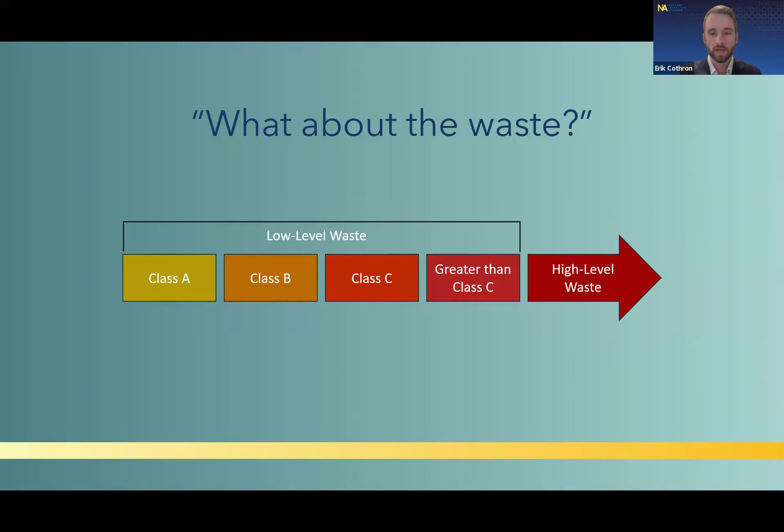The overall goal of waste management for any of the classifications you see here remains the same, and that's to safely isolate the waste and prevent any release of radioactive material to protect the environment and ensure public health and safety. But the specific storage, transportation, and disposal methods used need to be tailored to the specific waste classification in question.

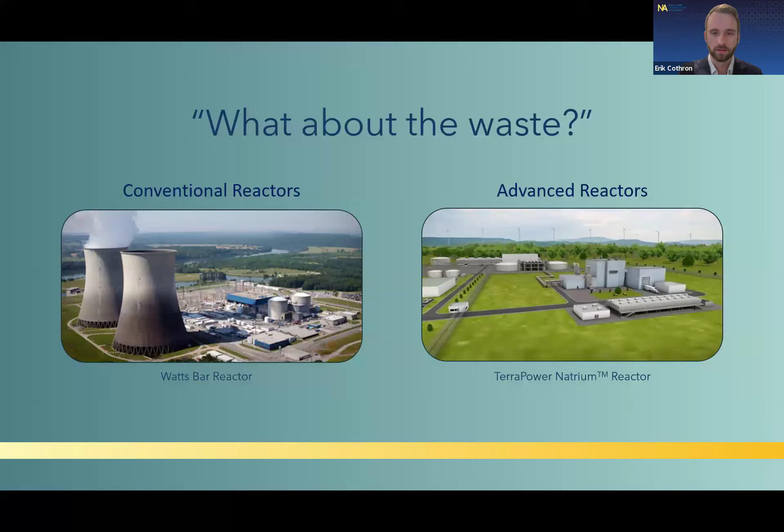The answer to the question, what about the waste, also depends on if we're talking about waste generated by conventional nuclear reactors or advanced reactors. So let's look at spent nuclear fuel from conventional reactors as an example. We know that it consists of spent fuel assemblies that contain uranium fuel pellets.

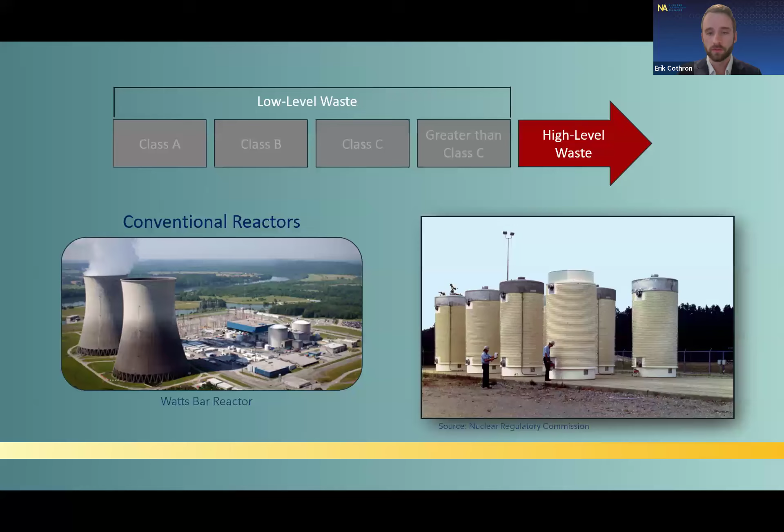So that covers conventional reactors, but what about the advanced reactors that we are seeking to deploy by the end of the decade? More specifically, what will waste from advanced reactors look like? How will it differ from waste generated by conventional light water reactors? How prepared are we to manage advanced reactor waste streams? And what areas require further investigation?

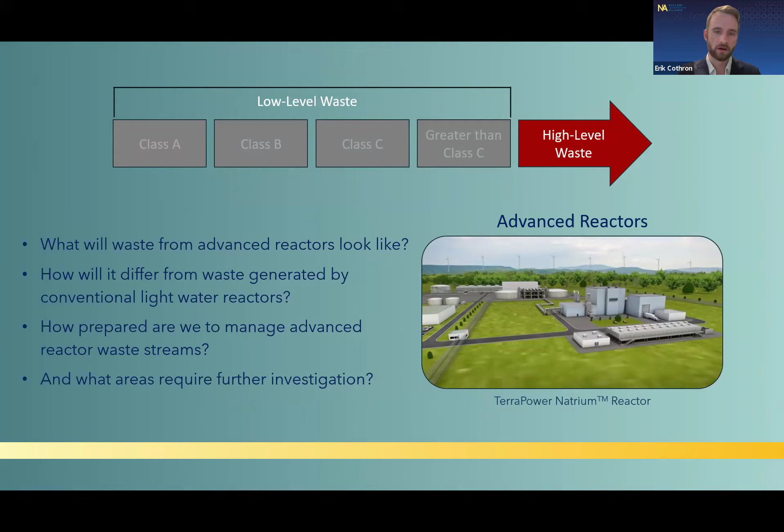And it's the answer to these questions that are exactly what our new report aims to provide. And just like Judy said earlier, the way we manage advanced reactor waste will generally look the same as it does for conventional reactors. We're going to place the waste in specially engineered containers or casks that are designed to safely store the waste until it has either decayed to a safe level, or for high level waste until we can send it to a permanent disposal facility.

But the specific waste management strategies we use must be tailored to the waste that's being managed and its unique characteristics. So in the next few slides, we'll take a closer look at these characteristics to get a better sense of what advanced reactor waste will look like.

Before we do that, I should note that the rest of my presentation today will primarily focus on spent nuclear fuel, because that's typically what most people are concerned with. And if you want more information on low-level waste, I encourage you to check out the full report.

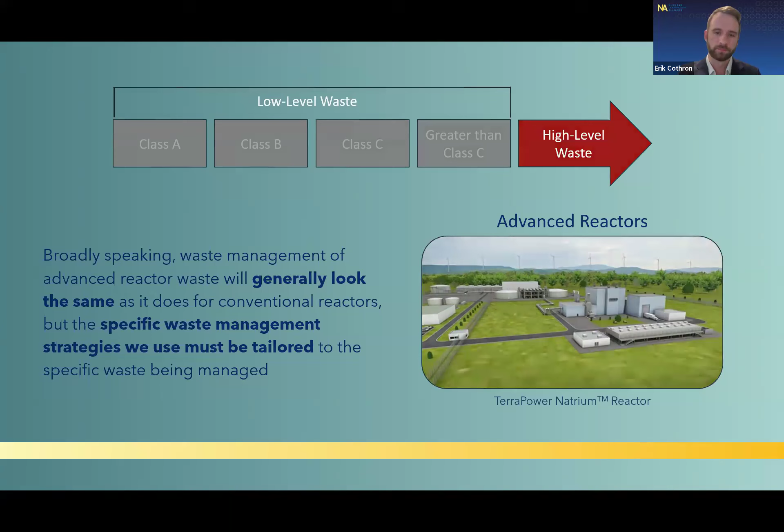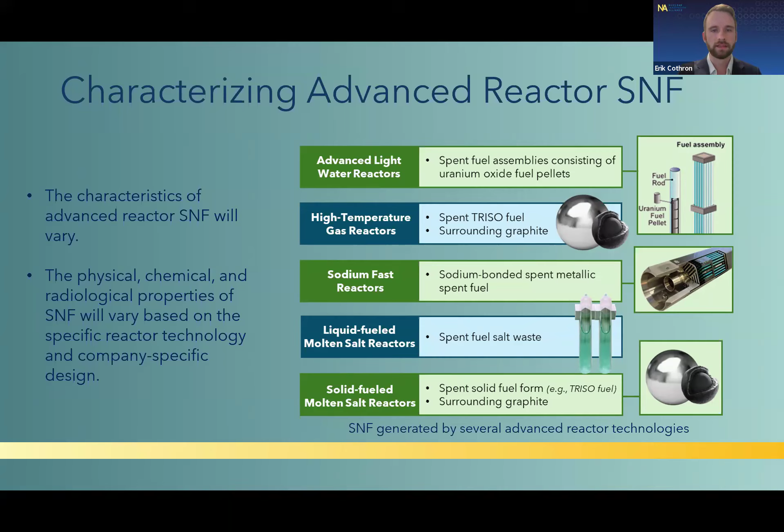So the characteristics of advanced reactor spent nuclear fuel will vary. More specifically, its physical, chemical, and radiological properties will be based on the reactor technology and the specific company design. The image here shows the spent nuclear fuel generated by 5 different reactor technologies, including advanced light water reactors, high temperature gas reactors, sodium fast reactors, and liquid and solid fueled molten salt reactors.

Looking at advanced light water reactors, we'll see that they will produce the same spent nuclear fuel assemblies as conventional reactors. There will be a few minor differences. For example, the overall length of the fuel assemblies used for advanced light water reactors will be smaller to fit in more compact, small modular reactor designs. But overall, advanced light water reactors and their spent nuclear fuel management will be identical to the conventional light water reactor spent fuel management.

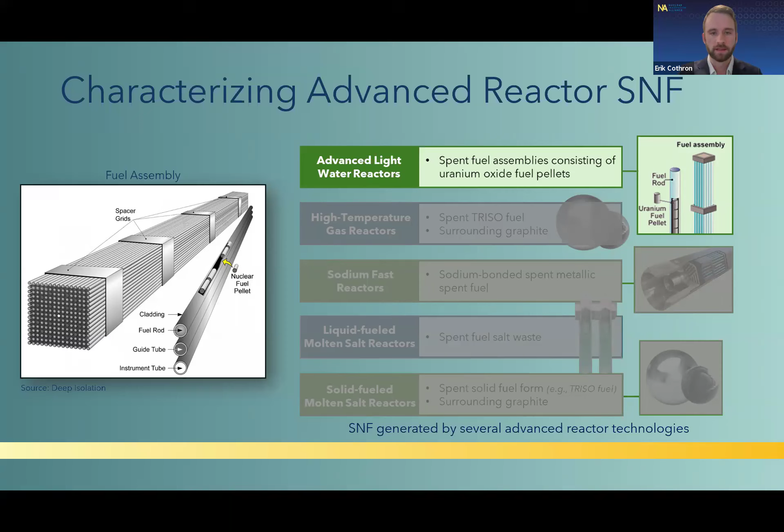High temperature gas reactors use TRISO fuel that consists of a uranium fuel kernel surrounded by several layers of carbon-based materials. These TRISO fuel particles are roughly 1 millimeter in diameter, so about the size of a poppy seed. And thousands of these tiny TRISO fuel particles can be embedded into a graphite matrix, like the spherical fuel pebble shown here, which is roughly the size of a tennis ball.

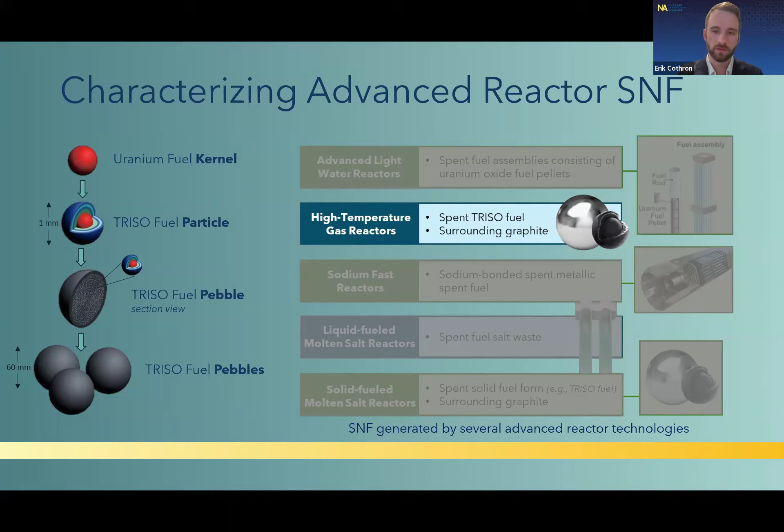So in this example, the actual spent fuel is the small TRISO fuel particle, but because there's no efficient or economic way to currently separate out the small TRISO particles from the larger graphite fuel pebble, the entire fuel pebble, including that graphite, is effectively your spent nuclear fuel form, which adds to the total volume of spent nuclear fuel that must be handled and disposed of.

Moving on to sodium fast reactors, they will generate a metallic spent nuclear fuel form that has chemically bonded to the sodium found within the fuel rod. And because sodium is highly reactive with water, we have to think about how to design and engineer containers or systems to prevent water from getting inside. This isn't necessarily a large challenge, but it's just an example of the kinds of specific considerations that need to go into managing different spent fuel types.

Now, in the interest of time, I'm going to skip over liquid and solid fueled molten salt reactors, but I encourage you all to dive into the full report to learn more about those.

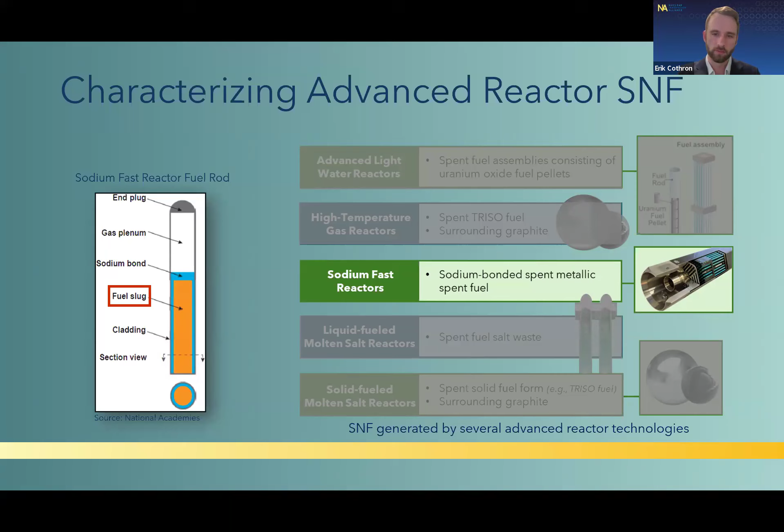Now, moving on to interim storage, because interim storage will play a critical role in the management of spent nuclear fuel, since the United States currently lacks a permanent repository. Fortunately, interim storage strategies are robust, and the United States is well prepared to ensure safe and effective management of spent nuclear fuel, including spent fuel from advanced reactors, until a permanent disposal solution becomes available.

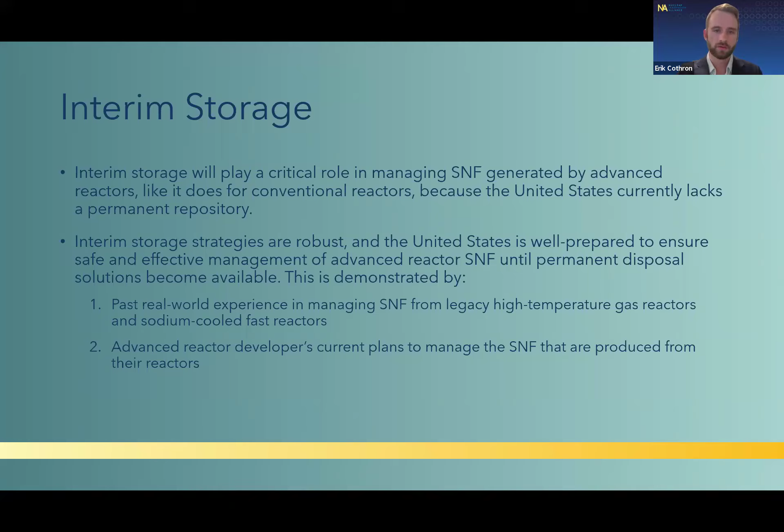This is demonstrated primarily by two things. One, past real-world examples in managing spent fuel from legacy high-temperature gas reactors and sodium fast reactors. We actually first operated these reactors back in the 60s and 70s. So in reality, these advanced reactor technologies and their waste aren't all that new. And number two, advanced reactor developers currently have plans to manage their spent nuclear fuel, which we'll take a look at in a few slides. But first, let's look at number one in more detail.

Here, we'll see that the United States has previously operated and decommissioned 2 high-temperature gas reactors and 5 sodium fast reactors, proving that the interim storage strategies we've already developed and used are robust, technically mature, and provide a means to safely store the spent fuel generated by future advanced reactors. So it's really the experience we've gained by already handling and storing this waste in interim storage that gives us a strong foundation for the future management of advanced reactor spent fuel going forward.

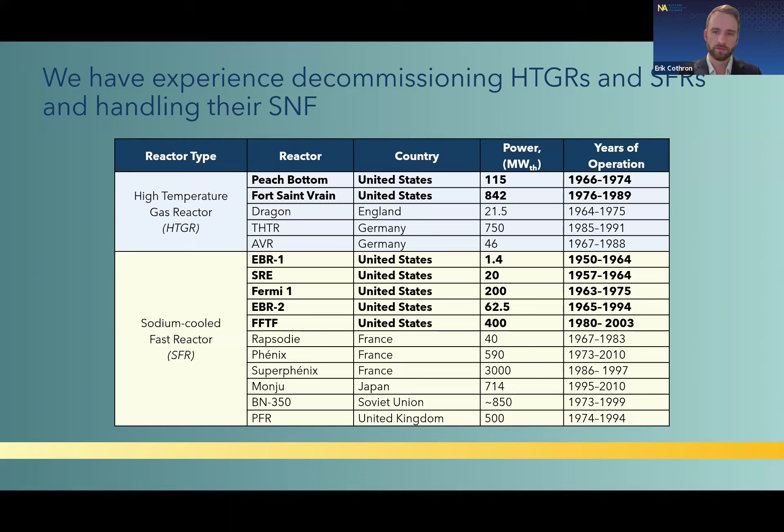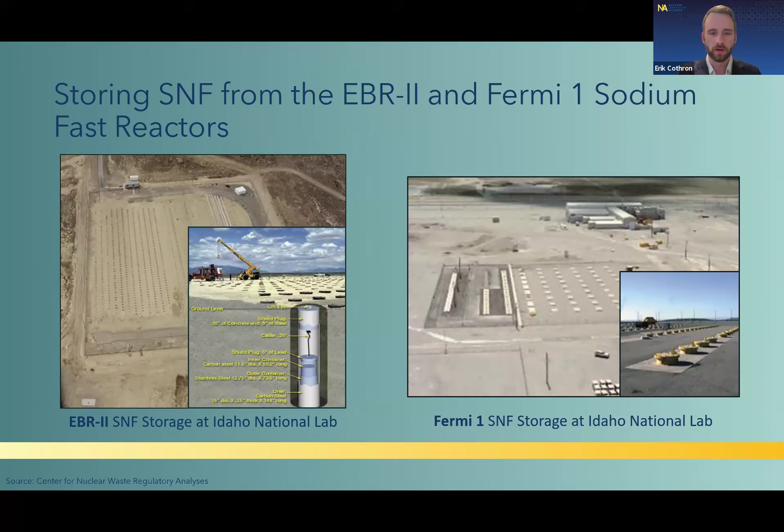Here are photos of the sodium bonded spent nuclear fuel from the EBR-2 and Fermi-1 sodium fast reactors, which is currently stored at Idaho National Laboratory. As you'll see, the spent fuel is in dry cask storage just below grade, and everything is stored in a very small footprint. And when I look at images like this, I can't help but think of how similar this looks to dry cask storage of spent nuclear fuel from conventional reactors, albeit below grade instead of above grade.

Now, moving away from the legacy reactors and looking towards the current plans that advanced reactor developers have to manage their spent fuel, here is a depiction of X-Energy's spent fuel intermediate storage facility that can be co-located with their Xe-100 high-temperature gas reactor design. In the top left of the image you see here, you can see how spent TRISO fuel pebbles can be moved with the use of a fuel handling system into spent fuel canisters, which can then be transferred to the storage facility through an underground access tunnel.

And then the renderings on the bottom here show how natural circulation of air can be used to keep the spent fuel cool.

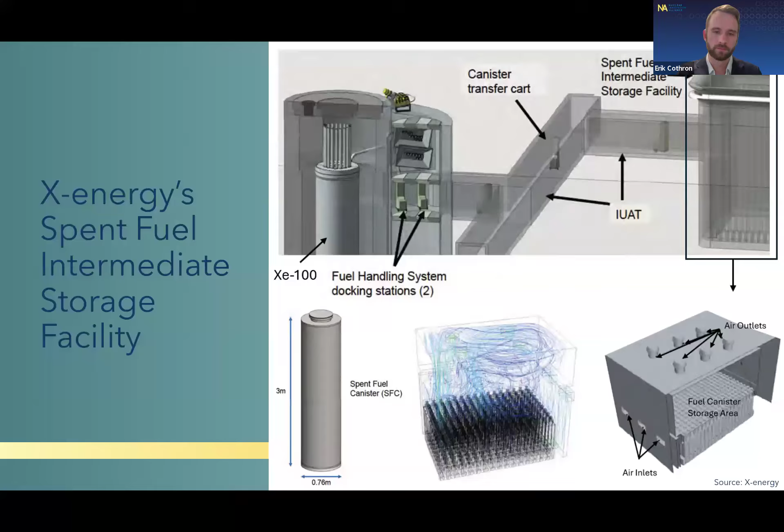Now, after interim storage, we need to permanently dispose of the spent fuel in some kind of deep geological repository. And while the United States currently has no such repository, it's important to note two things. That is, the safety performance of a geological repository is dominated by the engineered and geological barriers it utilizes, rather than the characteristics of the spent fuel. And therefore, advanced reactor spent nuclear fuel is expected to have little to no impact on the long-term safety performance of geological repositories, provided they are properly processed and packaged before being disposed of.

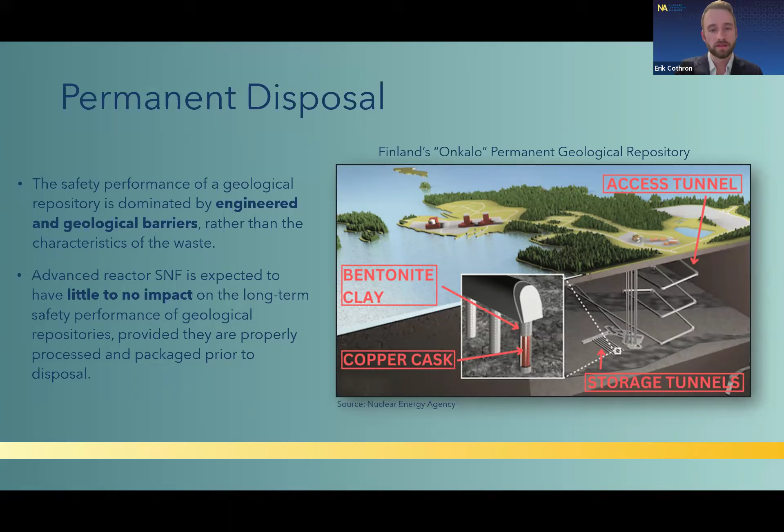And that begs the question, what does it mean to be properly processed and packaged? Well, some advanced reactor spent fuel may need to be processed prior to permanent disposal to reduce its volume, render it chemically inert, or stabilize it. There are certain challenges that exist, which we must overcome to ensure that some of these processing methods can be used at scale, mainly due to the complexity and current maturity of those methods. But the solutions to these challenges are all known to be technically feasible, and efforts are currently underway to develop them.

But not all spent nuclear fuel from advanced reactors needs to be processed. Some of it could also be directly disposed of without processing, and this is known as direct disposal.

And the decision to use direct disposal or to process it will ultimately depend on a future repository's waste acceptance criteria. Because we don't have one yet, the exact permanent disposal strategies we need for advanced reactor spent nuclear fuel have yet to be determined. I'll note there's a lot of additional nuance and interesting detail on processing which we don't have time for right now, but those interested should check out the full report to learn more about this or any other topic discussed.

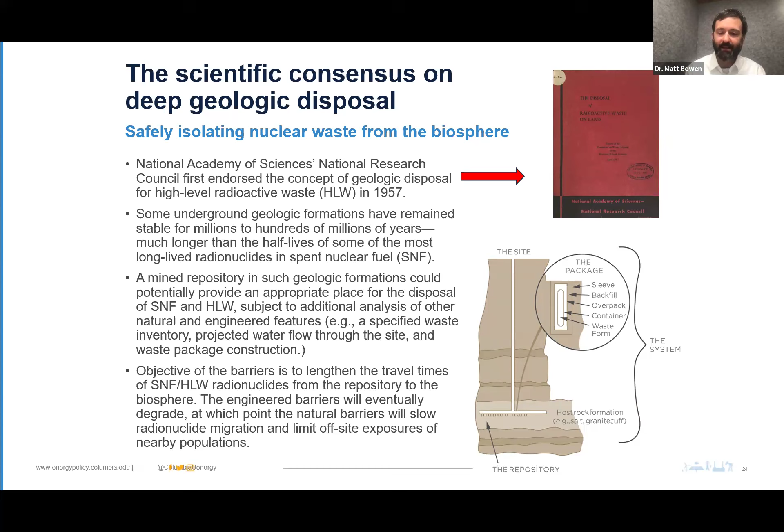My starting point is 1957, when the National Academy of Sciences first endorsed the concept of geologic disposal for high-level radioactive waste. The idea is that underground geologic formations have been stable for very long time periods, longer even than some of the very long half-lives involved in the radionuclides in spent nuclear fuel. A mined repository in these formations could potentially provide a place for disposal of spent nuclear fuel. You'd still have to do analysis to confirm that the combination of natural and engineered barriers would sufficiently lengthen the time it takes for radionuclides to reach the biosphere and protect human health, but it should be possible, and I think that scientific consensus has endured to this day. Next slide.

So how do we go about getting one of these repositories, since all of the advanced reactor concepts that Everett mentioned will have some level of long-lived radionuclides that will need disposal in one of these facilities? So how do we go about getting one?

Well, at least the current policy framework for how that's supposed to happen is still in the Nuclear Waste Policy Act of 1982. We'll talk later about how the U.S. program isn't really making progress, so we're probably going to need to amend existing law. But the idea was that the executive branch, the federal government, was going to identify two locations to potentially host deep geologic repositories for spent nuclear fuel disposal, with dates certain. There was even a cap on the first repository until the second repository started operations, and there were some good reasons for having two sites, including redundancy—in case something happened to one, the other would still be there. In any case, the federal government would take responsibility for disposal, and in exchange utilities would pay into a new nuclear waste fund. It was a polluter-pays principle, so that would fund the whole program.

However, just a few years later, the program suffered a couple of damaging steps. When the Secretary of Energy in 1986 announced that the candidate sites for the first repository had been down-selected from nine to three, he also announced that DOE was simply deferring the search for a second repository. This was widely perceived to be under political pressure from states in the East, especially those identified as potential candidates for the second repository. But it did lead to a flurry of legislative activity the next year, with members of Congress introducing bills that would alter the Nuclear Waste Policy Act, in particular to postpone the second repository program or get rid of it entirely.

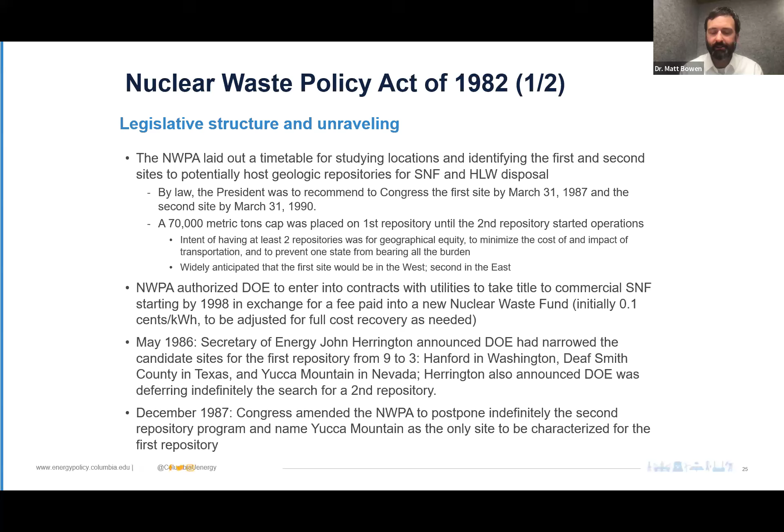So obviously the original process that had been laid out in the Nuclear Waste Policy Act did not come to pass. The final 3 candidates for the first repository were supposed to be characterized before the president recommended one to Congress, but Congress amended the Nuclear Waste Policy Act before that happened.

There was a cost concern, and I like this quote from Senator Bennett Johnston that I think does a good job of summarizing some of the cost pressures, but also the political maneuvering that took place.

Yucca Mountain was well funded for a good number of years. A lot of science and research was done. In 2002, President Bush recommended the site to Congress.

As was allowed in the Nuclear Waste Policy Act, the governor of Nevada submitted a notice of disapproval. Congress voted to override that notice. DOE would submit an application to the U.S. Nuclear Regulatory Commission to construct Yucca Mountain. That was at the end of the Bush administration.

The Obama administration came in and sought to withdraw that application, zeroed out the budget request. Congress has not appropriated money to move Yucca Mountain forward since then.

And you had years where utilities were paying over $700 million into the Nuclear Waste Fund, but no money was being appropriated. So eventually, lawsuits led to courts stopping those fees. We haven't had fees paid into the Nuclear Waste Fund in now over a decade.

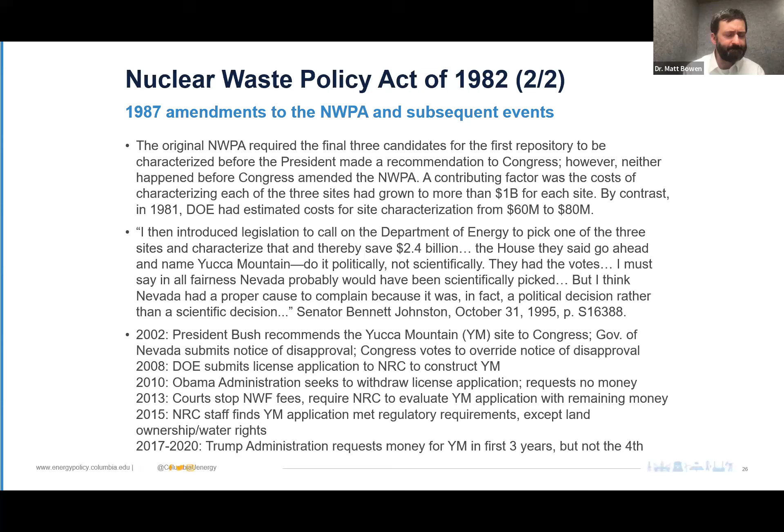Apart from this stalemate, I'd argue that there are some reasons, and other people have made these arguments too. We actually do have an operating deep geologic repository in the United States, the Waste Isolation Pilot Plant in New Mexico, which has been disposing of defense-generated transuranic waste for over 25 years, with over 14,000 shipments transported to the site safely.

We also, in the 80s, were not especially concerned about climate change, which has emerged as this imperative where we're extending the lifetime of existing reactors that are today producing 2,000 metric tons of spent nuclear fuel each year. We're talking about building new reactors, which we definitely were not in the late 80s.

And on account of all these broken contracts as a result of the failure to take title to the spent nuclear fuel and move the Yucca Mountain project forward, the liability - this is a very recent update - has steadily increased.

Now, on the more positive side, other countries have moved forward with their repository programs. Sweden is getting close to construction. Canada just selected a site. Next slide.

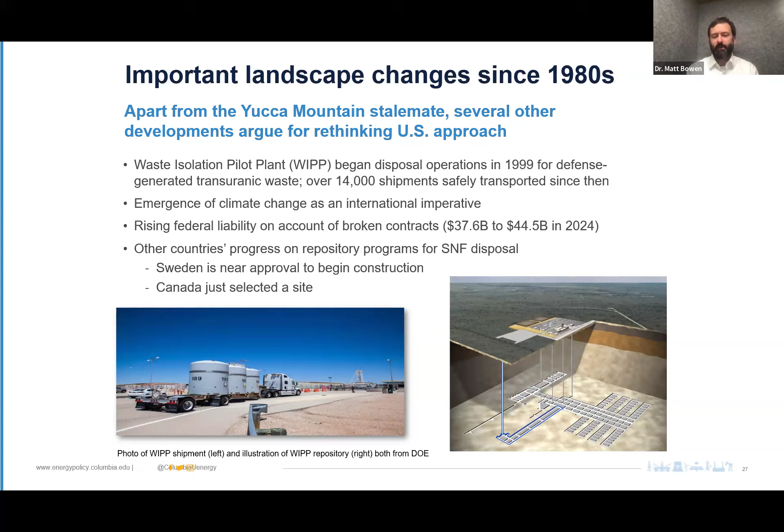And Finland, as the sort of international leader, has basically finished building their repository. They're doing this trial run of placing spent fuel canisters in the repository that do not have radioactive material, but they are obviously moving close to that, and maybe disposal operations will start next year or the year after that. Next slide.

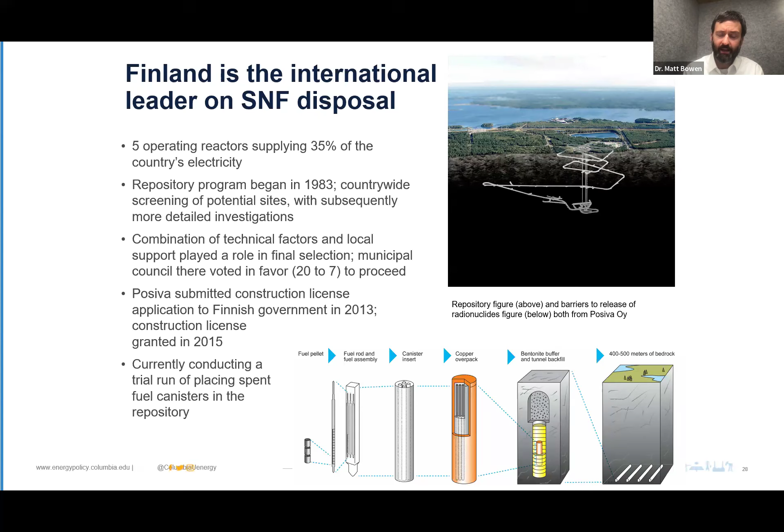When the Obama administration moved to withdraw the license application for Yucca, they put together a Blue Ribbon Commission on America's Nuclear Future, which issued reports and recommendations in 2012. I'd say they're still relevant.

I don't know, they haven't been implemented since they came out, and I don't know what the new administration or new Congress will do. But the reasoning behind them is in these other countries and with WIPP, in the cases where you've had local communities that have supported the projects, they've been making progress. And in WIPP's case, you didn't have the state of New Mexico getting to a point where they opposed the project.

As other folks have pointed out, since the 70s, you might want to implement this program outside of the Department of Energy, an organization that changes political leadership pretty regularly, and has a mixed track record in terms of engendering trust or mistrust with states and local governments.

And fixing the funding to the nuclear waste program would obviously be a good thing to do. As I mentioned, there were years where over $700 million were paid into the Nuclear Waste Fund as mandatory fees, but no dollars were appropriated for the program. And we have not obviously begun an effort to develop new deep geologic disposal facilities.

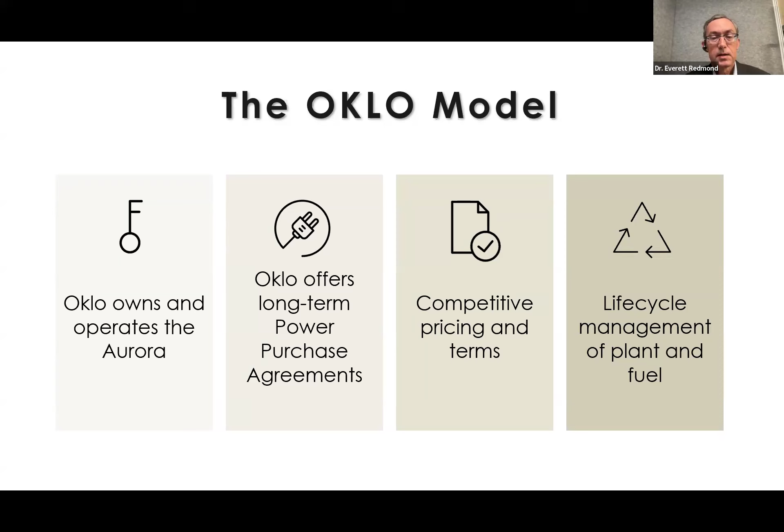Next slide, please. So what is our technology? We refer to the reactor as the Aurora powerhouse because, as I said, we are providing power rather than selling the reactor. The first model we're going to be building is a 15 megawatt electric, liquid sodium cooled fast reactor, uses metallic fuel. I'll show a picture in a second. It uses high assay low enriched uranium up to 19.75%, or uranium transuranic fuel from recycling, and I'll talk about that as well. It's important to note the HALEU here up to 19.75% because that's a big difference from the operating fleet right now, which only uses 5%.

So the cost of our fresh fuel, manufactured fresh fuel, and cost of the uranium going into our fresh fuel is going to be noticeably higher than the cost of uranium going into the existing reactors. And that's going to come into play in my conversation.

Our next design is going to be a 50 megawatt electric, so we're very quickly going to go from 15 to 50. This first one, 15 megawatt electric, is going to be built at Idaho National Laboratory, and we're going to submit the application to the Nuclear Regulatory Commission next year.

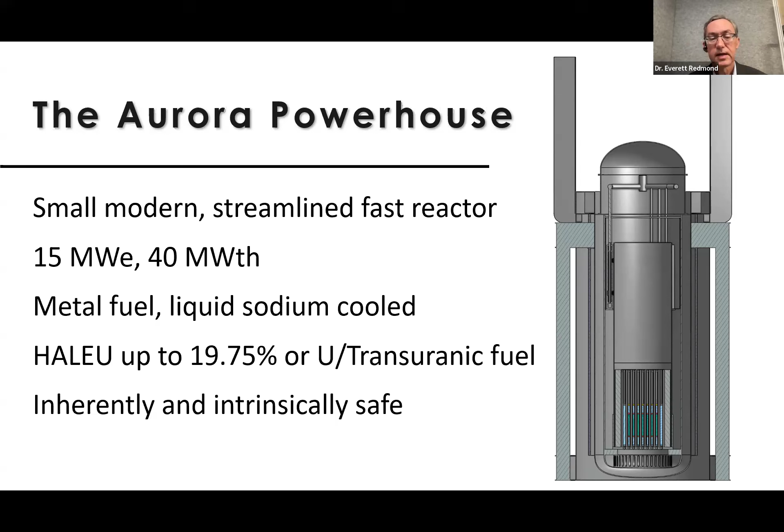Next slide. So fast neutrons, why fast reactors? Well, fast neutrons enable us to unlock more energy from the fuel. Basically, you're able to recycle fuel and burn some of the elements, transuranics, that are considered poisons in water-cooled reactors. In fast reactors, that poison becomes a fuel for us, enabling us to do things a little differently than the operating fleet. Also, with liquid sodium, you're operating at close to atmospheric pressure, so you're not a highly pressurized system, meaning more inherent safety is built into the design.

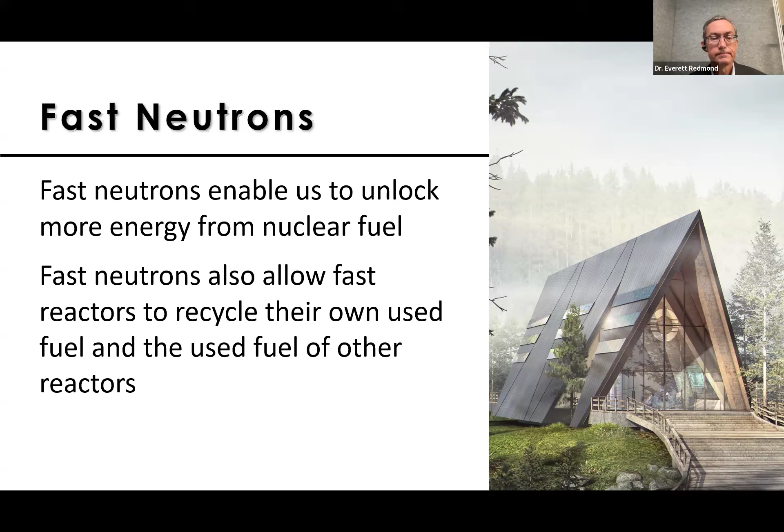Next slide. This has all been proven before. Experimental Breeder Reactor 2 operated for 30 years at Idaho National Laboratory, at what is now called the Materials and Fuels Complex out there, and it demonstrated both recycling, operation of a sodium-cooled reactor, as well as the inherent safety features of that. They ran experiments turning off the cooling systems, and the reactor heated up and automatically shut itself down based on the physics.

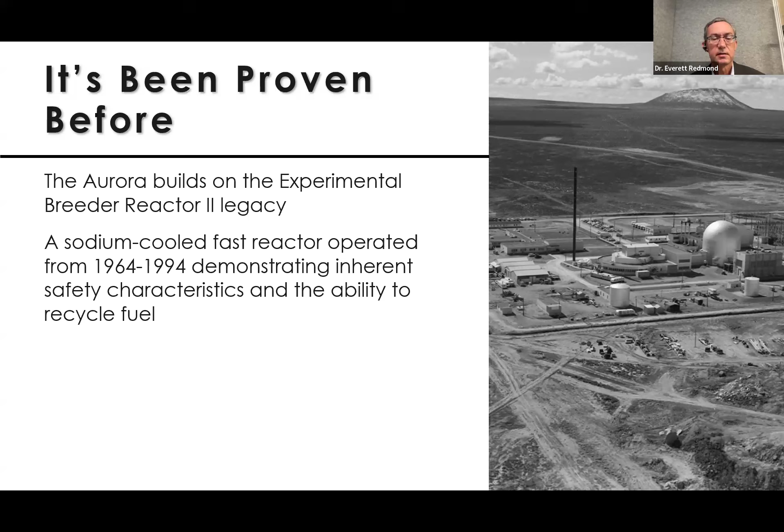Next slide. So let's talk a little about deployments. The first reactor is going to be deployed at Idaho National Laboratory, with the license application going in next year. We've also made public announcements that we've signed MOUs with Southern Ohio Diversification Initiative, SODI, in Southern Ohio at the old Piketon facility, for the potential deployment of a couple reactors there. We also have letters of intent with a number of companies, and we see the data center area as our potential biggest customer.

We have a financial investment from Equinix, one of the larger data center companies out there. And there's huge interest, as you've seen in the news recently, in nuclear from the large hyperscalers as well. So there's a great opportunity here to move forward, and that's what Oklo's doing, as well as trying to appropriately manage the back end of our fuel cycle.

So what does our fuel look like? It's metal fuel inside fuel rods. The image you see is actually a picture of EBR2 fuel. The metal fuel rods are bundled together inside a metal can. In that respect, it looks very similar to a boiling water reactor assembly where you've got rods inside a metal can. Ours looks more hexagonal versus square, but still conceptually the same.

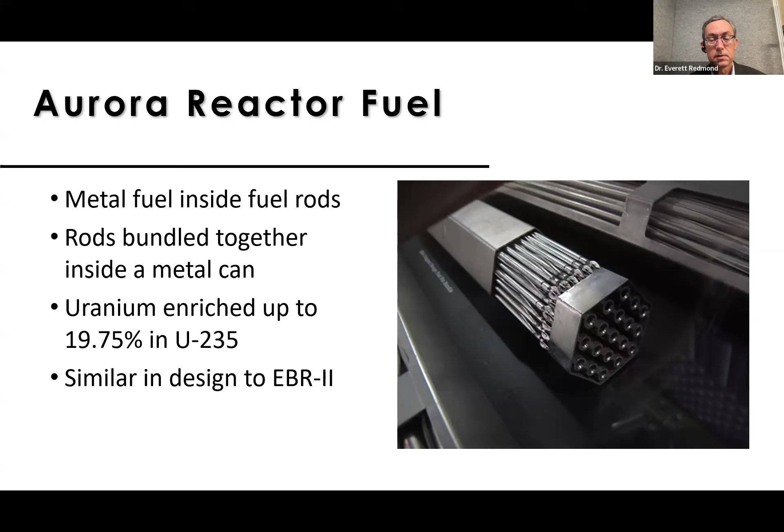Uranium, as I said, is enriched up to 19.75%, which is different than the existing fleet. Our design is similar to EBR2. So in this respect, we are again dealing with metal fuel, solid fuel, like Eric talked about at the beginning of the presentation.

So our first reactor is actually going to run off of recycled fuel. And as I said, we've got the building out there. This facility will be DOE authorized because it's within the Idaho National Laboratory. Our reactor will be in our NRC-licensed and commercially operated facility.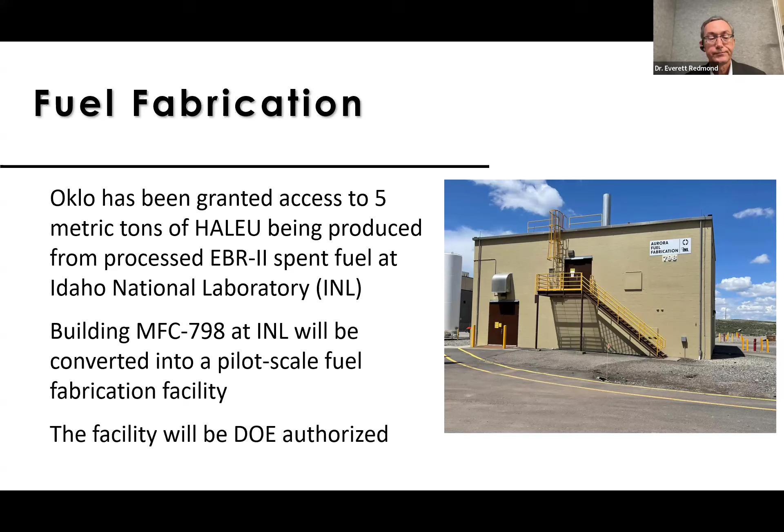Now, I have to emphasize that recycling does not eliminate the need for geologic disposal. There will always be a need for a deep geologic repository. It's just that the materials coming out of the recycling facility will be different than the spent fuel coming directly out of the reactor. But there'll still be high-level waste that needs to go to a deep geologic repository.

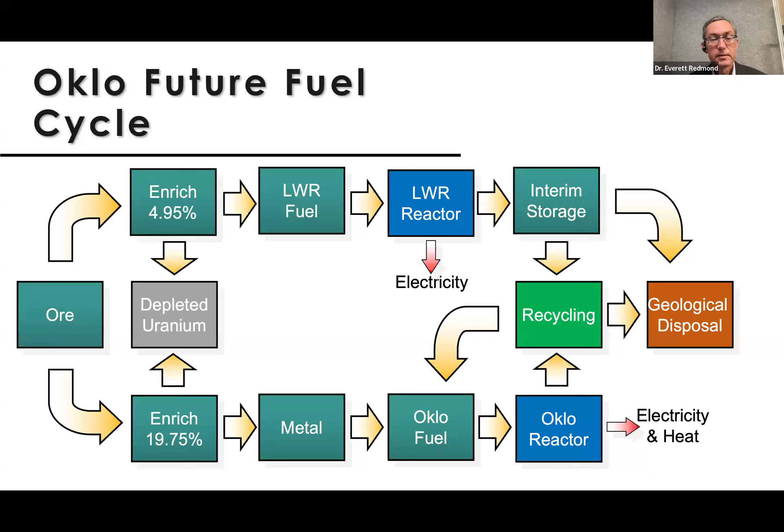From our perspective, recycling is important because we own the entire reactor and the operation. We build, own, and operate, and we are selling electricity at the end of the day. So we're going to be pursuing a commercial scale recycling facility using electrorefining technology, based on decades of work at Idaho and Argonne National Laboratories.

Oklo has engaged the Nuclear Regulatory Commission. We're in pre-application interactions with them. We have not published a date as to when we'll submit an application to NRC. But from our perspective, recycling is expected to produce fuel more cheaply than fresh HALEU. I mention HALEU because that is more expensive uranium than what's used in the light water reactor fleet. So the economics for us on recycling are different than the economics for the light water reactor fleet, plus there are benefits to the back end.

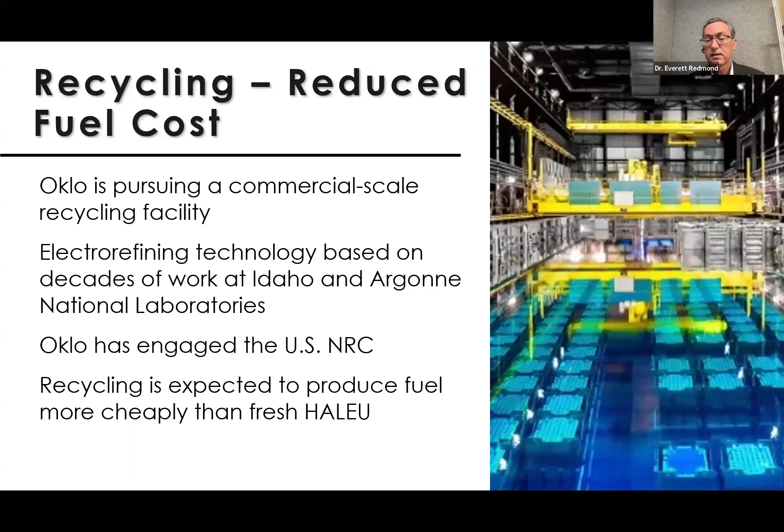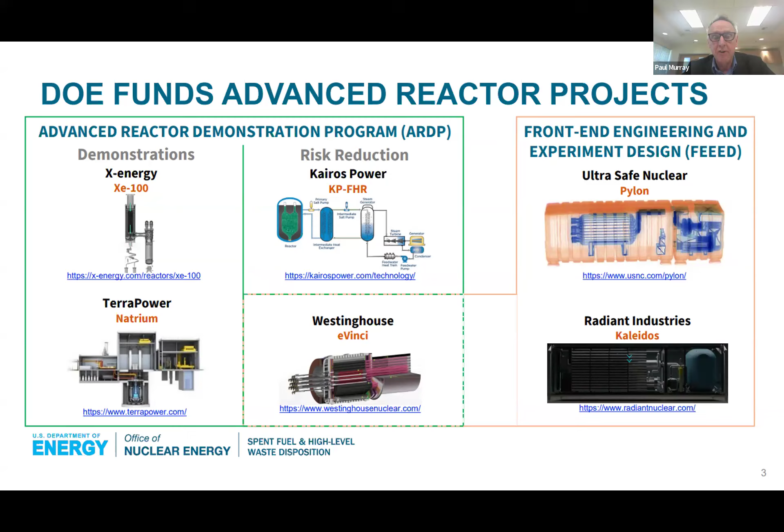Next slide please. So DOE is currently funding a lot of different advanced reactor designs. As the designers and operators consider the operating costs of these reactors, they have to remember the costs associated with the long-term disposition of spent nuclear fuel.

As was mentioned earlier, we have been using nuclear power in the US now for over 66 years. In 1982, the Nuclear Waste Policy Act was put into place. At that time, DOE signed standard contracts with the light water reactor utilities to collect and manage their spent nuclear fuel for a long time. The utilities started to pay into the nuclear waste fund based on a fee on the amount of electricity they produce. Today, that nuclear waste fund stands at about $50 billion.

The important takeaway from this slide is there's a long established program for management of spent nuclear fuel from advanced reactors in the US. And the cost of disposing of a light water reactor assembly is pretty much a wash between the different types of light water reactors that are currently out there.

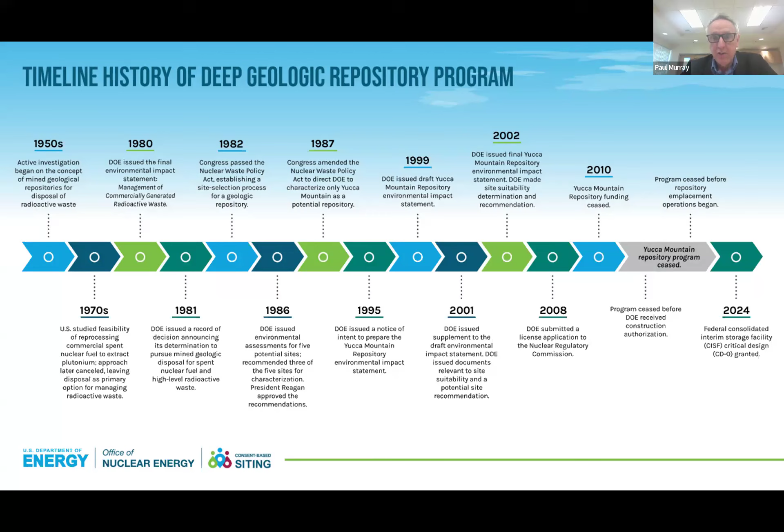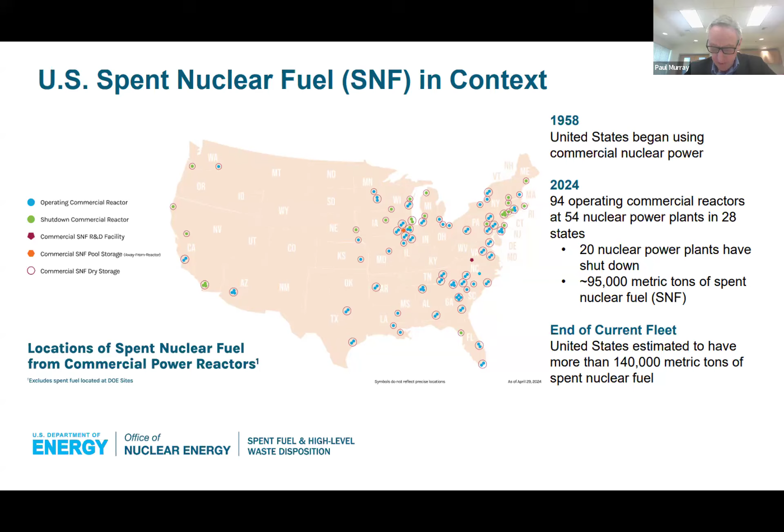Next slide please. So currently we have 94 operating reactors, 20 reactors are completely shut down. Today, as we sit here talking, there's 95,000 tons of spent nuclear fuel from the light water reactors. At the end of life of the current light water reactor fleet, there will be 140,000 tons of spent nuclear fuel that need to be managed and disposed of in a deep geological repository.

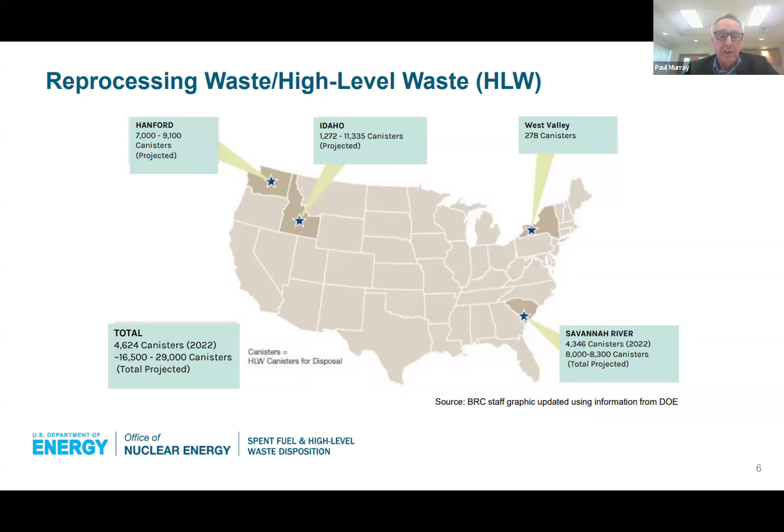Next slide please. So my program is also responsible for disposing of defense programs high-level waste. DOE Environmental Management is turning high-level waste from the reprocessing of 140,000 tons of spent nuclear fuel into vitrified canisters. These canisters are approximately 2 feet in diameter, 14 feet tall. DOE EM, over the next 30 to 40 years, will produce somewhere between 16,500 and 29,000 vitrified high-level waste canisters as a direct result of reprocessing 140,000 tons of fuel.

So now, for partial breach of contract, we're close to paying $50 billion to the US utilities. To put that into perspective, $50 billion is about the cost of 4 nuclear-powered aircraft carriers. Okay, so that's how much we're going to pay to the US utilities moving forward.

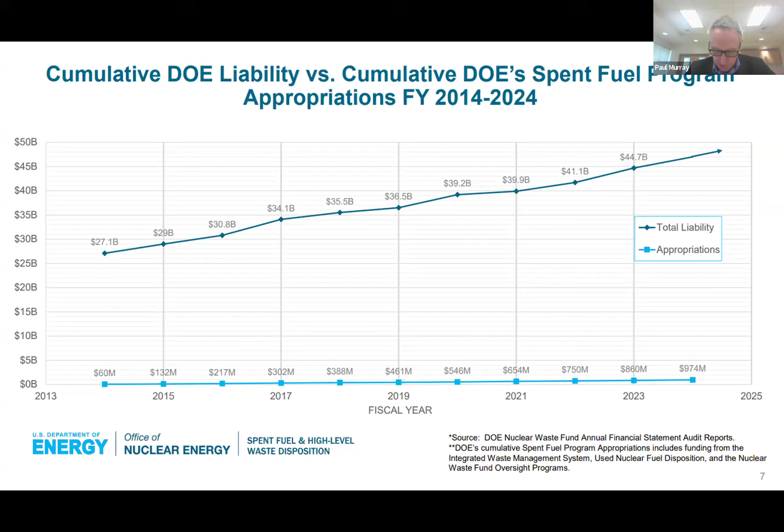Next slide please. My program, therefore, is important. We are responsible for turning up to the reactor site and taking title to the spent nuclear fuel at the gate, transporting that spent nuclear fuel to an interim storage facility or to a geological repository program. It's important to remember that the Deep Geological Repository Program, 20% of that cost will be paid for by defense programs. The other 80% will be paid for by the commercial nuclear fleet.

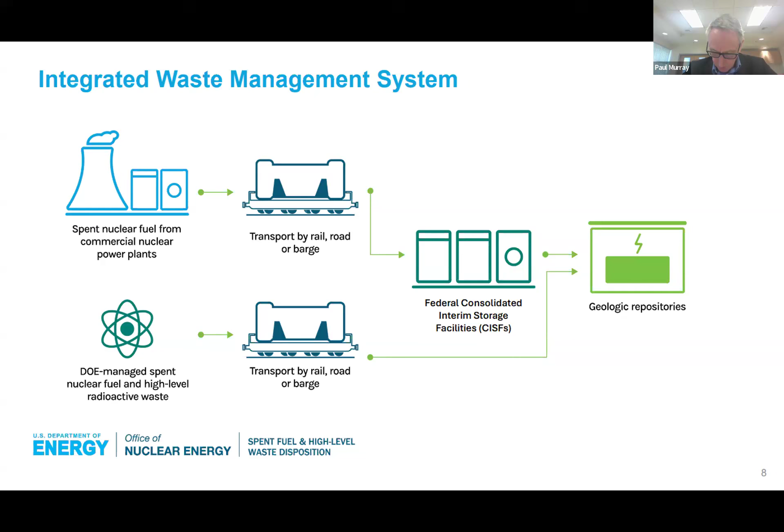Next slide please. So DOE, because we're funding all of these advanced reactors, we set up a working group called Back-End Management of Advanced Reactors. DOE has been looking at the storage, transportation, and long-term disposal of advanced reactor fuel. This group started over 2 years ago and is now concluding. We are ready to start negotiating an amended standard contract with these advanced reactor companies.

It's important to remember that the original contract negotiated with light water reactors during the last nuclear renaissance about 15 years ago, when we were going to build over 25 big PWRs, the standard contract was amended. So any reactor built now, including Vogtle 3 and 4, cannot sue DOE for not picking up their spent nuclear fuel. The new contracts say DOE will collect the spent nuclear fuel at some point, many years after the reactor has shut down.

Okay? Once again, there's nothing technically stopping us from picking up this spent nuclear fuel and disposing of it. However, I'm going to keep going. Next slide please.

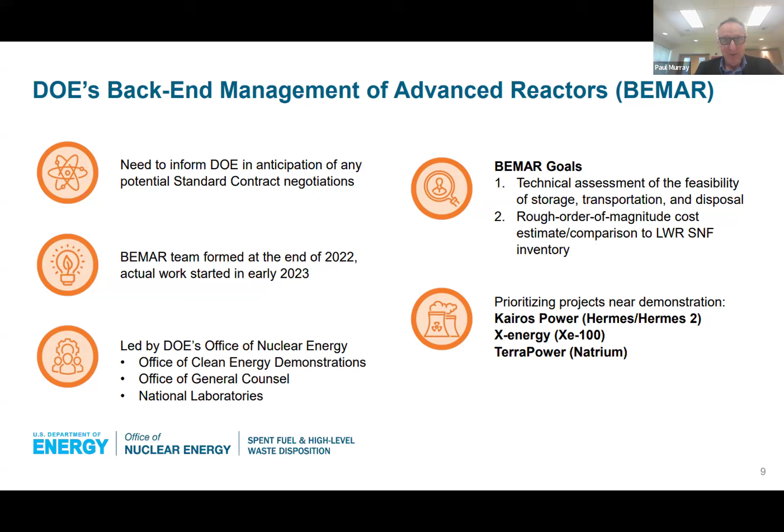National Repository - the Nuclear Waste Policy Act is still the law of the land. There is a waste acceptance criteria associated with that Act and the Yucca Mountain site. So we can accept no RCRA material into a future repository.

As a previous speaker mentioned, we do have an operational deep geological repository at the Waste Isolation Pilot Plant. Following an incident there that shut down that facility for 2 years, we will take no pyrophoric material into a future deep geological repository. We'll also take no liquids.

The design of a repository is in part based on criteria such as heat load. So if your fuel is too hot, it will have to stay at the reactor site and be stored until such time it can be shipped and disposed of.

This is also a very important point: everybody has to pay their fair share of the cost of final disposal of the spent nuclear fuel. DOE is not responsible for treating spent nuclear fuel or high-level waste to meet the criteria. This has to be part of the O&M cost for the reactor.

For public confidence, spent nuclear fuel that finally makes it into a repository will have to be retrievable for 50 to 150 years after the last waste package is placed.

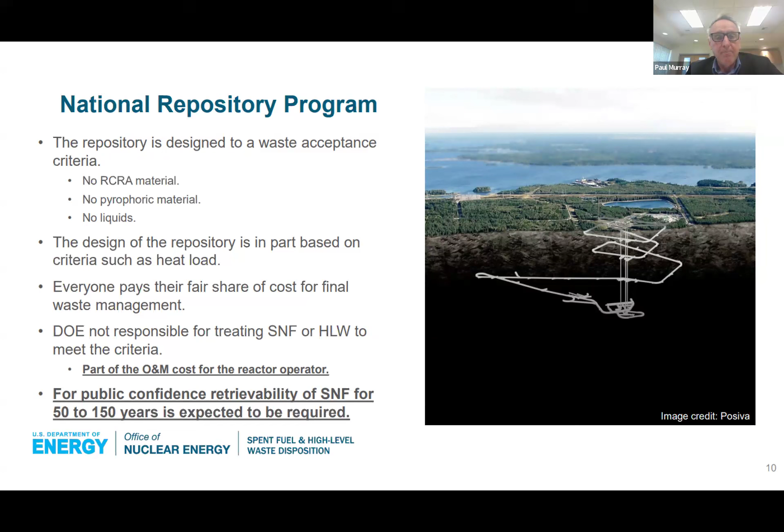So in conclusion, we're 50 years into a nuclear waste management program in the US. Spent nuclear fuel management cannot be ignored, and it is an important part of the NRC licensing process for new reactors.

NRC licenses the design of the reactor. To get a construction permit to build the reactor, the operator has to be in good faith negotiations with DOE - we're in good faith negotiations with everybody. To get an operating license, the reactor operator has to sign an amended standard contract with DOE.

Another important fact: DOE is not responsible for the management of coolant. For final disposal, everyone pays their fair share. Reprocessing still results in high-level waste.

As I mentioned, EM has reprocessed 140,000 tons of spent nuclear fuel and will produce 21,000 high-level waste canisters. And I'll say this again because some people don't believe this.

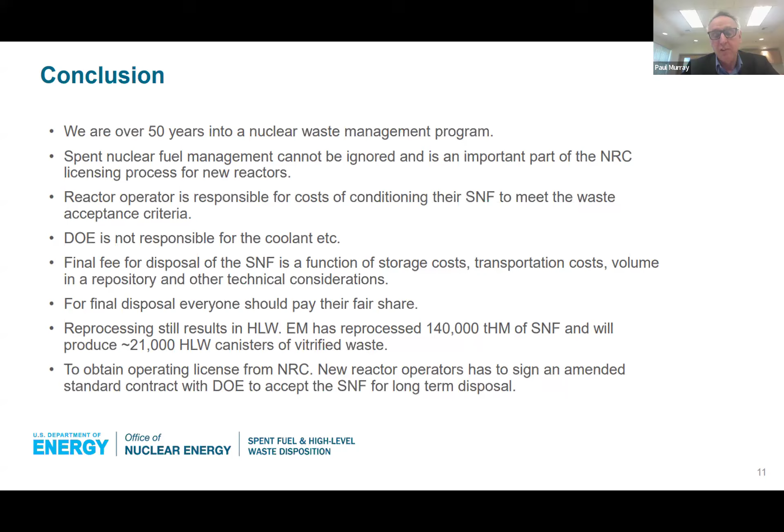To obtain an operating license from NRC for your reactor, the new reactor operator has to sign an amended standard contract with DOE to accept the spent nuclear fuel for long-term disposal. And that's the end of my presentation.

Wow, thank you very much. That was not just informative, it was also really interesting. Even I learned a couple things there. Thank you, Matt and Everett and Paul, for sharing such an insightful presentation.